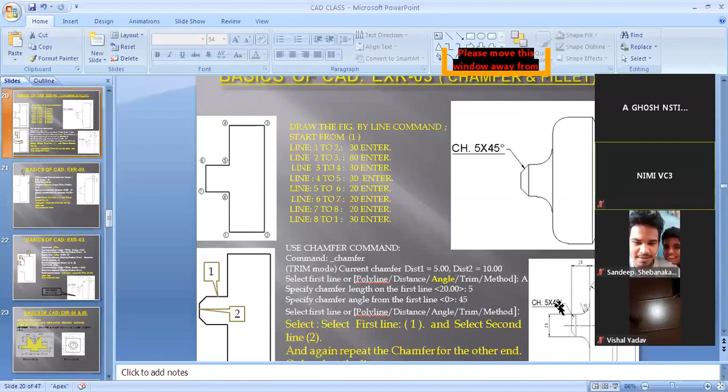That means if you give the first dimension as 10, then as per the figure you have to choose that first line too. And if you give the first dimension as 5, you have to choose the first dimension line accordingly. Look at the command - whatever dimension it shows, you have to choose and give the dimension accordingly. So if I take the first dimension as 10 and the second dimension as 5, you have to select the first line and the second line as per this dimension. We'll see this in AutoCAD and it will become clearer.

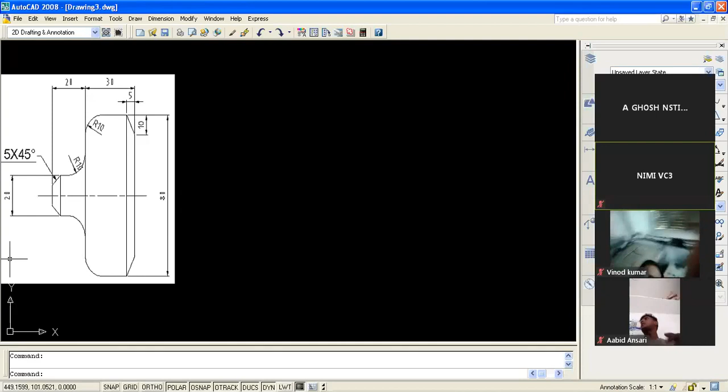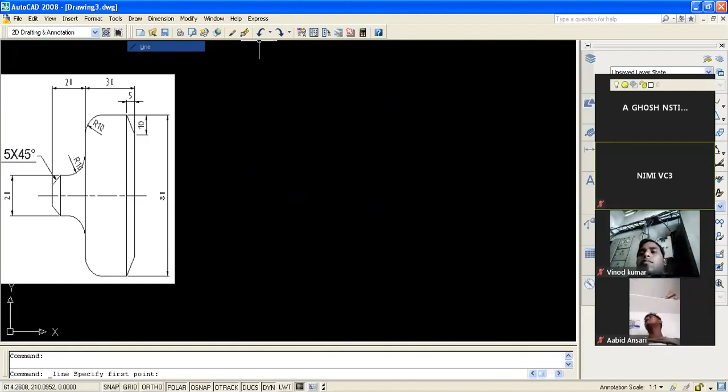From some point, as we made it before, we draw it like this - here 30, then take it 80. Sorry, then come to this point, this is also 20, and this is 20, and this is 20, it's like this. So first you make this 8-sided drawing.

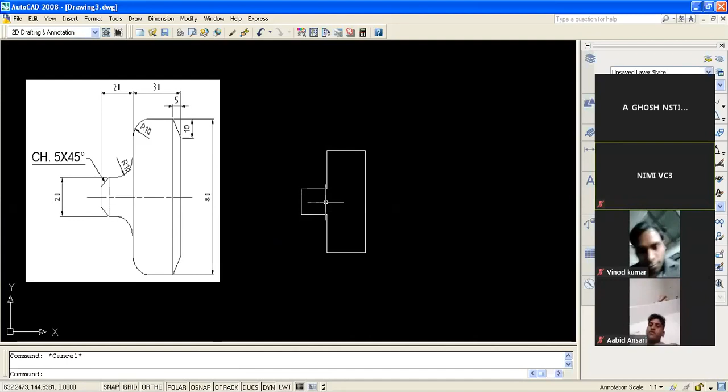Then the command asks to specify chamfer length. The length is 5 mm - you give 5 and enter. Then chamfer angle, 45 - enter. This is a 45 degree angle. Now comes the selection box - so you select this line and this line.

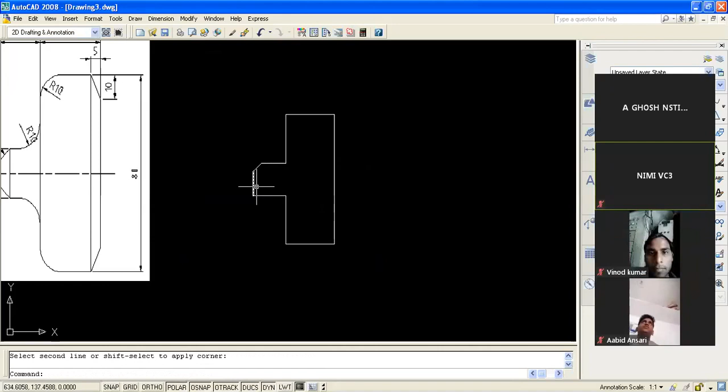Chamfer is done. Again repeat chamfer. Select this and this. Chamfer. Okay, now we go again for chamfer.

Now I am taking the option as distance, because in this area the distances 5 and 10 are irregular, so I am taking distance. First distance, chamfer distance. I am taking first distance as 10, enter, and second distance as 5, enter.

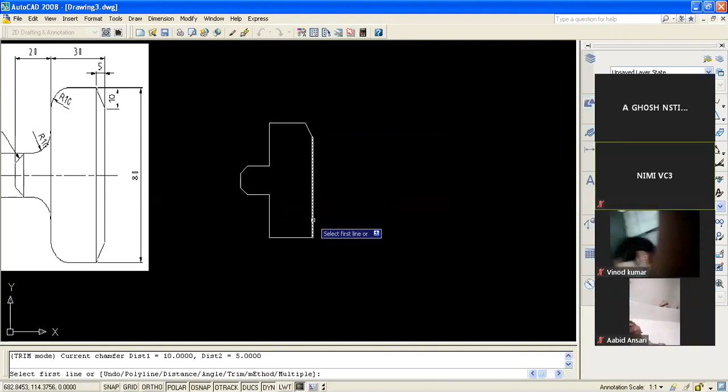So 10 we gave first, 10 is on the vertical line. So you have to click the 10 here first and then 5. Again repeat: 10 means vertical line first, second 5, and then complete.

So on this side also your chamfer is completed. Now I want to make the fillet on this corner, this corner, this corner, and this corner.

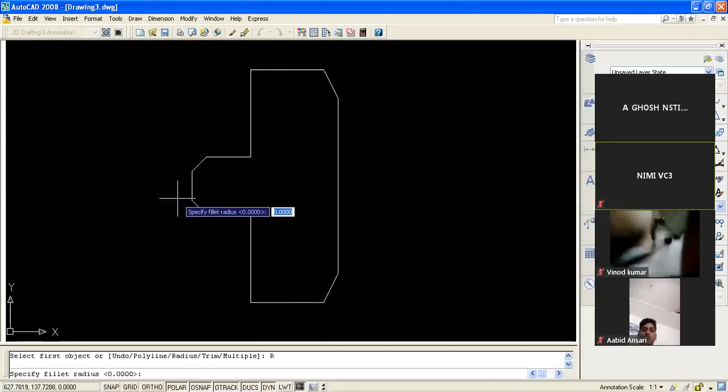So you go to modify, take fillet, right click, give the radius value - radius is 10, enter it, and the direction box will come.

Now select the first object, that means first line, maybe this line or this line, either is fine, no problem. So I am taking this line first and then the second line.

Right click, repeat fillet, again take this and this. Again I am taking fillet for this and this. Again I am taking this and this.

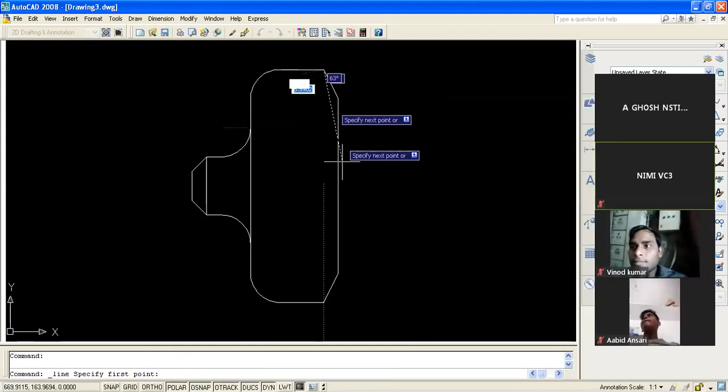Okay, complete. After that you go to the line command, click this line, and this line. Okay, so your drawing is complete.

So in this exercise, what we learned is that in the modify command there are two commands: one is chamfer and the other is fillet, and these are very important commands, used in many drawings.

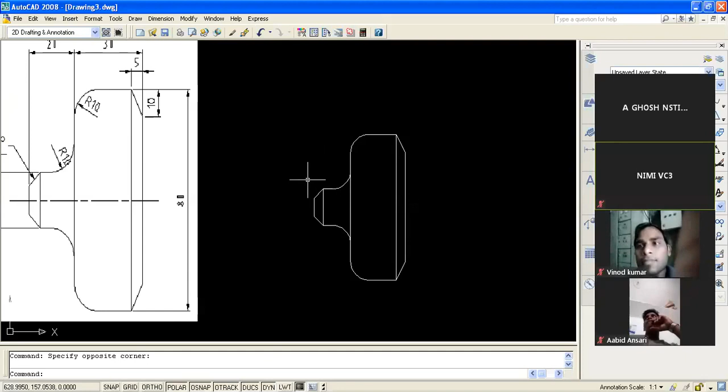So this is a very important drawing command. So you can use this command, fillet and chamfer.

Okay, now again we are coming here in the PPT. The next PPT is there, that is exercise 4 and 5.

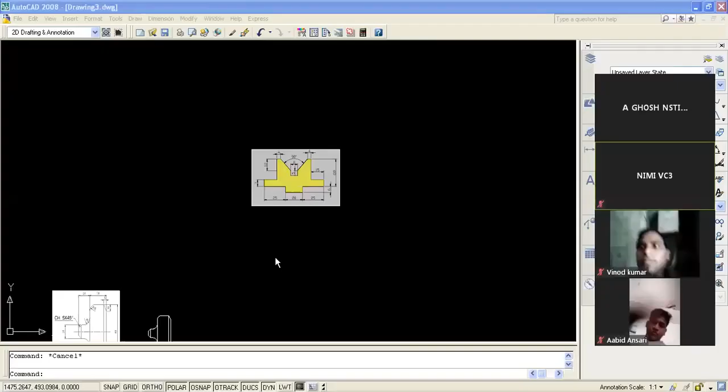Okay, now I want to make this drawing. What is that command? It is the line command. So from where I want to start - this is the technique of the drawing.

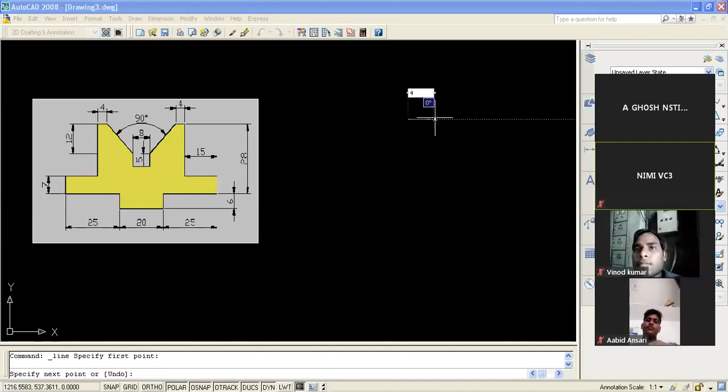Then I am coming, this line should be 4. Then I am taking here this 15.

Now I am coming here, this is 7. Then I am coming this side, this is 25. I am coming here, this is 6. Now I am coming here, this is 20.

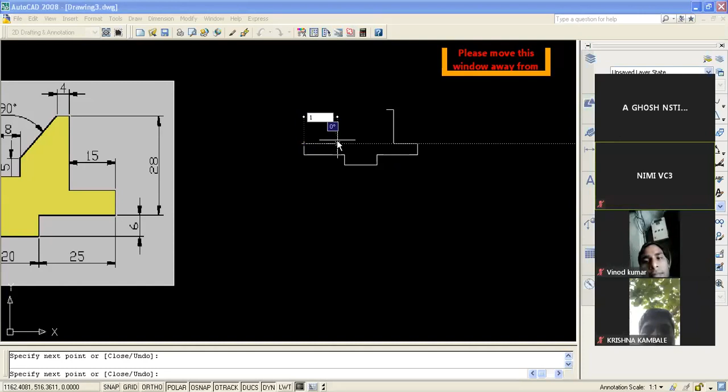Now this you can typically get from track, 25. You can get this also from track. With the help of this I am giving this dimension, 15, enter. Then I am coming here and this is 4.

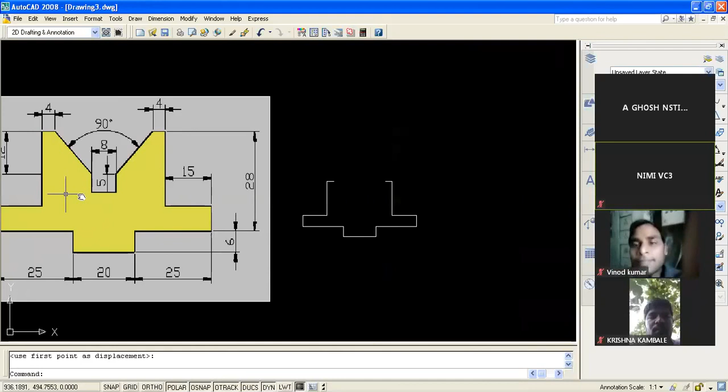Okay, now up to this the drawing is okay. Now what is the dimension there? This dimension - this height is 12, and this is also 5, and total is 28. So and 6, 34. So this point to this point is 17.

So you have to just click the line command and no need of any click, just move your cursor along the axis or track. So we give the 17 and enter, then your cursor will come shifted here.

So we just give this value 4, because this is total 8. I am taking from the center line, this is 4, and this I am giving as 5. Now come to this point and select line.

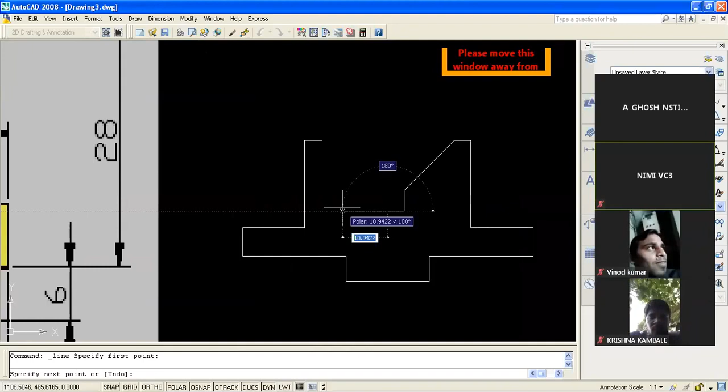Okay, and now again you go there, take the line command, again take this as 4, and this is similar to this, and come here. So this block is completed. This is the V-block drawing. Okay, so as per the dimension you can make the drawing.

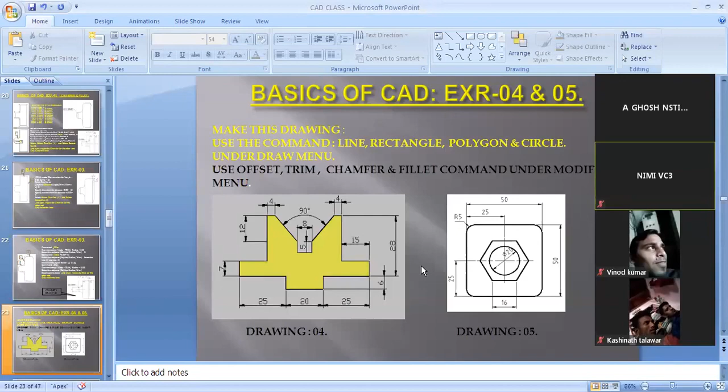So now again I am showing the PPT. The next slide is there. After that, this is the homework. You can make these two drawings as per your knowledge and skill, with the help of the previous commands: line, circle, polygon, and also modify command.

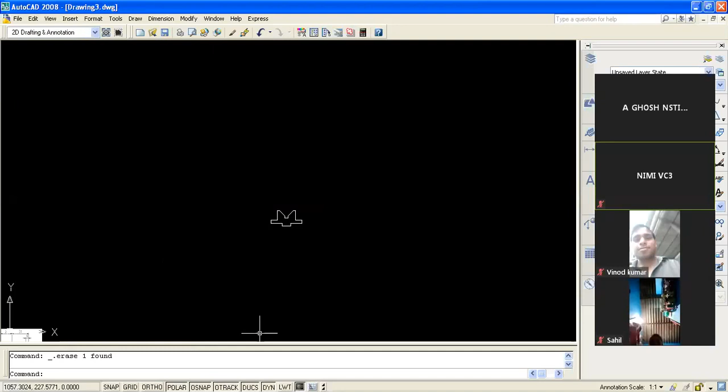So now the first circle: you go to the draw command, take circle, diameter is here. What is that? That is 100. You give the 100 diameter. Now go again diameter, same circle, diameter is 40 and enter.

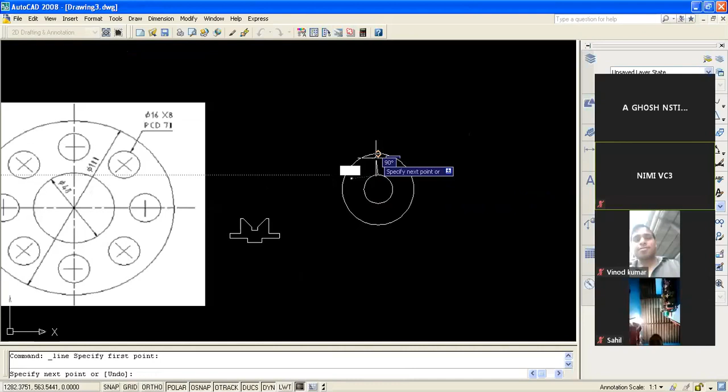Now the small circle's PCD is 70 mm. So you can take the calculation, or you can just make a line here. You do the draw command and diameter, click this midpoint and give 16 and enter. So you don't need to do the calculation, you can take this away also.

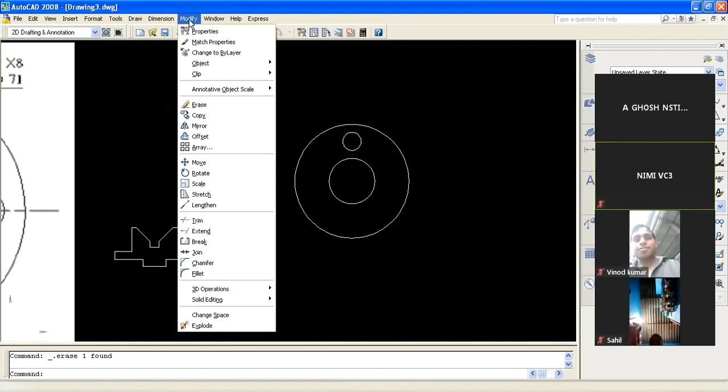Now this small circle, how will we make 8 circles from it? We go to Modify, take Array command, then this dialog box will come into the screen. There are two options: rectangular array and polar array. So you click the polar array option.

Now from the polar array, first you click the center point. Where is that center point? You click this option, just click here and pick the point from the screen. So you click this center, automatically the value will come here.

Then the method. If you click on method, you see there are three methods in this: one is total number of items and angle to fill, another is total number of items and angle between items, another is angle to fill and angle between items. So whichever choice you want to make, make it.

Normally we take total number of items and angle to fill. Total number of items is 8, and angle to fill is 360, which is default. Then you go to select object, select this small circle, right click, and come here to the preview command.

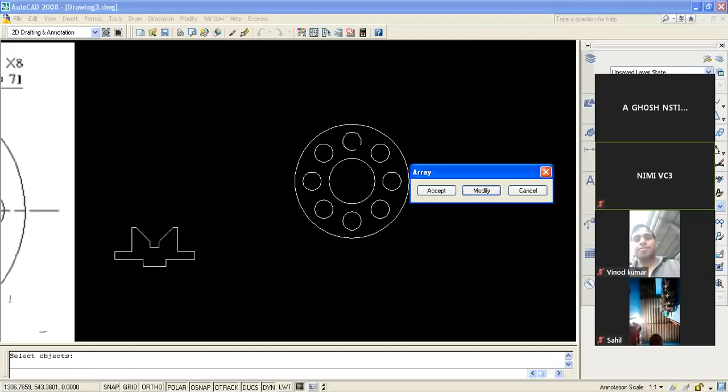If you go to preview command, it will show that it has been done. Now you can click accept or modify. If anything is wrong or any incorrect value is there, you go there, modify again, choose any modification. After that, take preview again and go for accept. So it is completed.

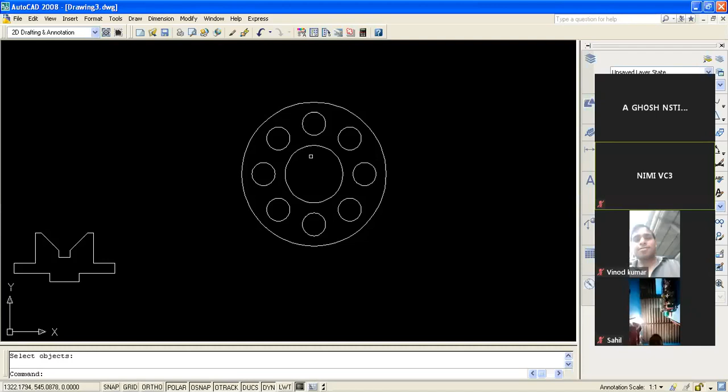Now, one additional thing: if it's a full circle, you can't tell which side it rotated from, clockwise or anti-clockwise. Suppose I want to make it like this, suppose I want to make it on this side - how is that done? Let's see how this is made. I want to make it on my right side.

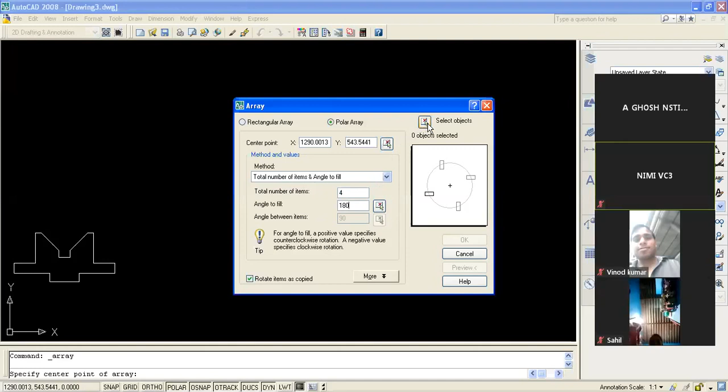For this you go to Modify, again take Array command, center is here, same center, total number of items and angle. So instead of 8, I am giving 4, and this angle will be 180, select object will be here, select this and enter, preview it.

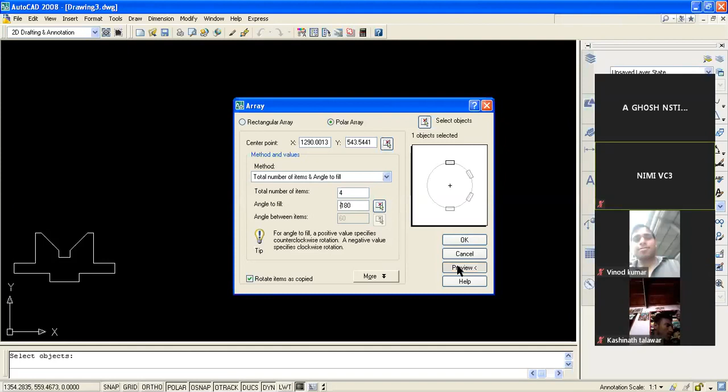See, so it is taking this side, but I want this side. How is that possible? Now go again to Modify, and instead of 180, it is normally taking anti-clockwise. If you want clockwise, then give minus 180, and preview it again. See, it is this side now.

So if you want to make it clockwise, always give the angle value as minus. If you want anti-clockwise, then give the plus value of the angle. Okay, then accept it.

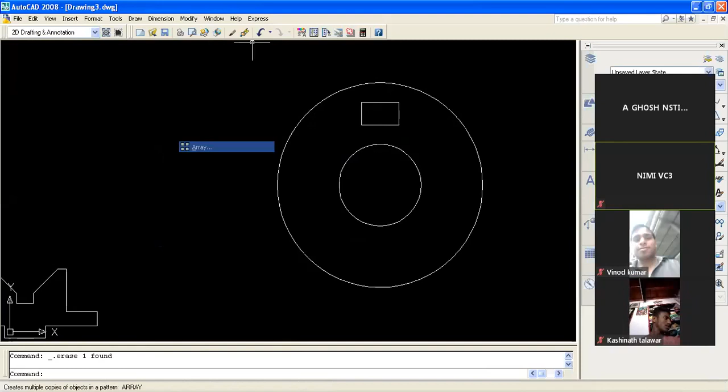Another important thing: suppose instead of a circle, I want to make a rectangle here, a small rectangle, and rotate-copy this rectangle into 8 numbers. Delete it, now go to Modify, Array, center is here, number is 8, and angle will also be 360, select object is rectangle, and preview it to see.

This is also the array operation, but you see this is shifted, not in the center. Why? Because there is one option, and you can manually check this. This is called 'Rotate Item as Copied'. That means rotate the item as it is copied.

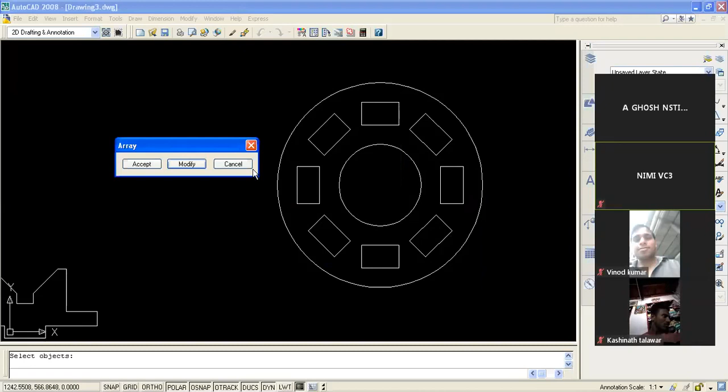You need to turn this on, it stays on by default. If by chance you don't turn it on, then if you turn on this Rotate Item as Copied and get the preview again, only then it can rotate like this, otherwise it will not be done. So this is a very important command, Rotate Item as Copied - this option should always stay on.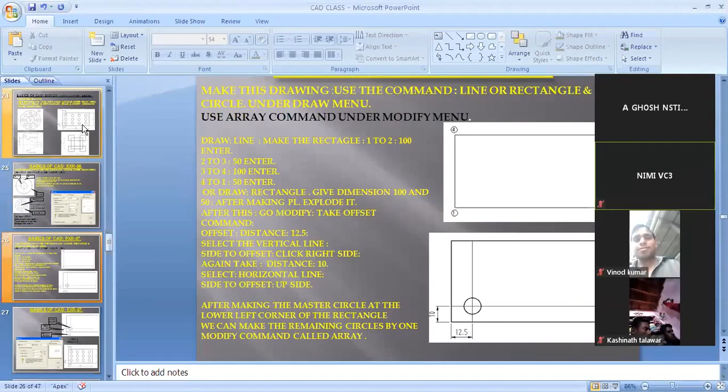First draw a line, make the rectangle from 1 to 2, 2 to 3, 3 to 4 and 4 to 1. A rectangle is formed with dimensions 100 by 50.

Next you need to make the small circle, the master circle. The process is: go to the circle command, take center diameter, but since you don't know the exact point, and it is an irregular distance of 12.5 on this side and 10mm on this side, you have to go to the offset command and take the offset value first as 12.5.

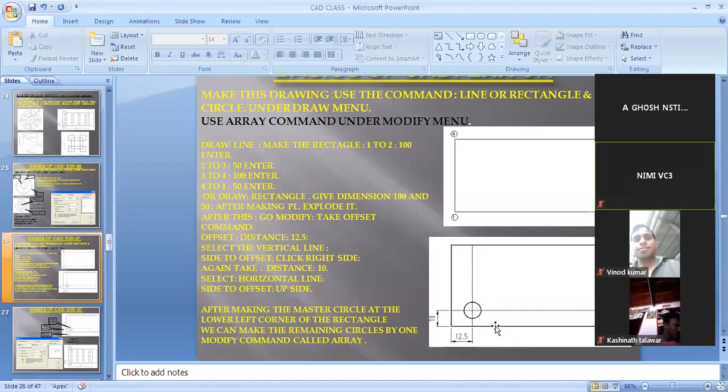Then go to the circle command, take center diameter, click this point as the center and give the diameter, then the circle will be displayed.

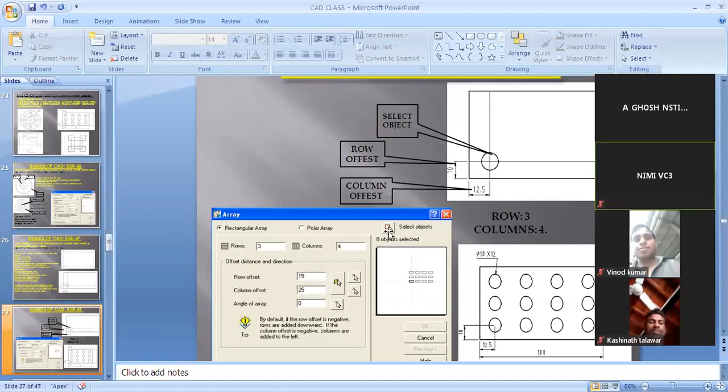Angle to array - angle is not there so it's 0. Then you go to select object - what to select? The master circle we made, select this circle as the object. This value is the row offset value, this is the column offset value, and select this circle as the object.

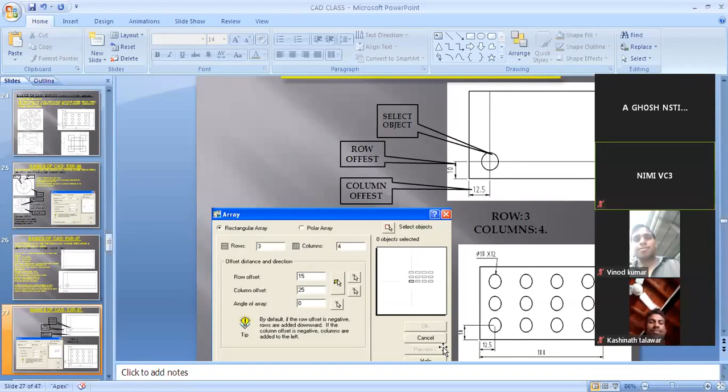So again I am showing you this in my AutoCAD. So I am taking AutoCAD.

So, rectangle, dimension is 100, 50, enter. Now I am taking the modify command and I just offset this rectangle.

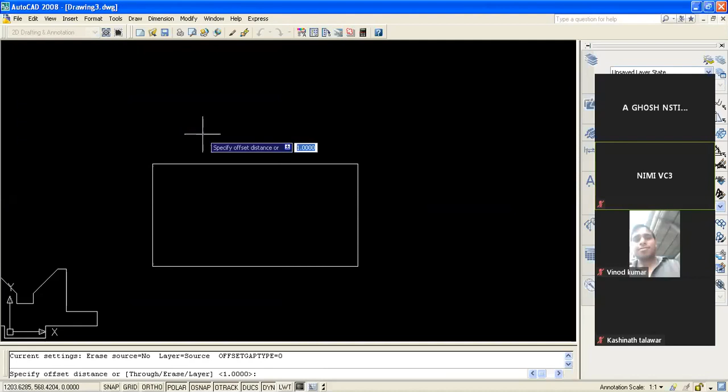Go to the modify command, take offset, value is first 12.5, enter. This is from here, and again I am taking 10, enter. This is from this side. No, I think this is not that.

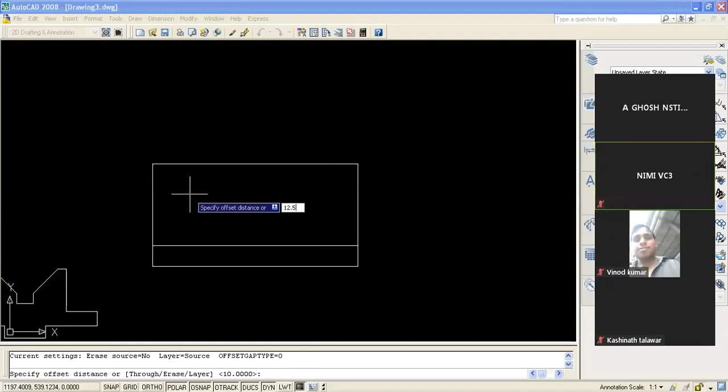Offset 10, okay, 12.5 from this side. Okay, fine.

Now we go to draw circle diameter from this located point. Intersection, first click it, and the diameter is 10, enter it.

After that, just select two lines and delete them on either side. Now I want to copy this circle into a number of circles as per my drawing.

The command is Array, Rectangular Array. Number of rows is 3, number of columns is 4, row offset meaning distance from one row to next row is 15, column offset is 25.

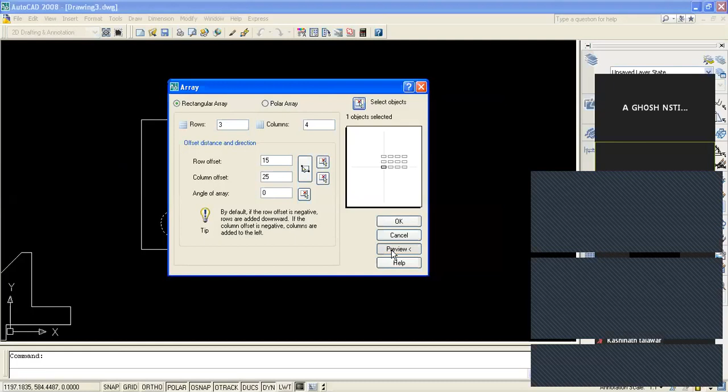And angle is 0. Select this circle as the object, enter and preview it. So see, the drawing is like this. Okay, no problem, so accept it.

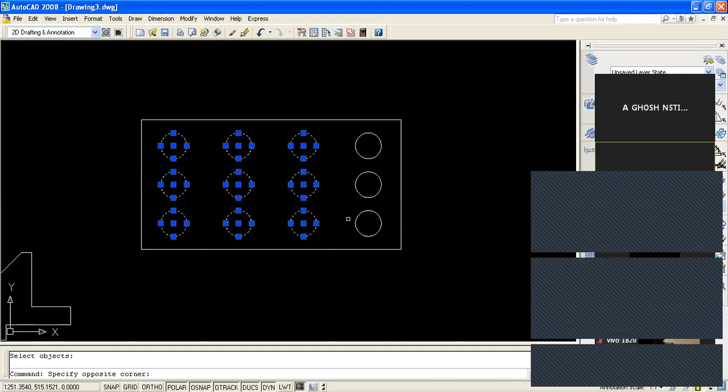But additionally I can say something - if this circle is not here, maybe I made it here instead. Some students can make it in this corner too, no problem, you can make your circle in this corner.

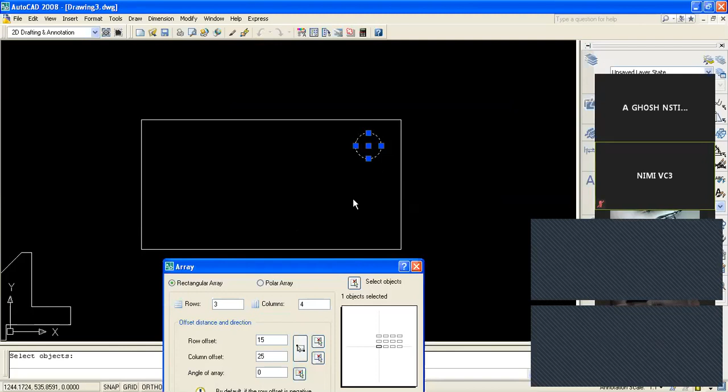So if I take this value as minus, and give the minus to this value, and this is also minus 25, and preview it, then it will go okay. So this is the difference.

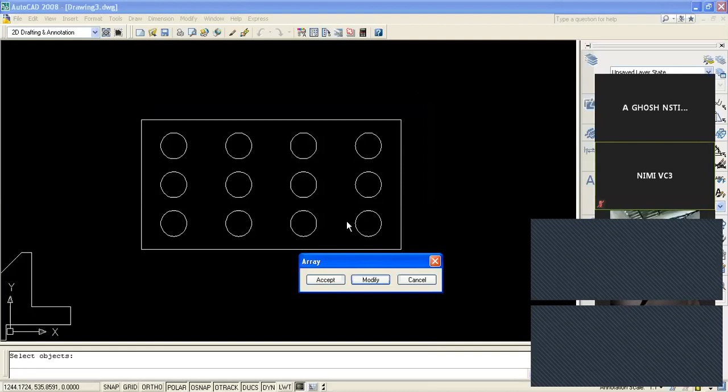If you choose any corner instead of this corner - if this corner is the first quadrant, it's positive and positive. If you come to this corner, it will be positive and negative. If you come to this corner, it will be negative and positive. If you come to this corner, both will be negative. So in this way you can reorient your basic circle, the parent circle, in any direction. Okay, this is the circle.

Another thing is there. Suppose I'll show this additionally. Suppose your drawing is like this. Now I want to make a plate like this, and in this I will make that circle.

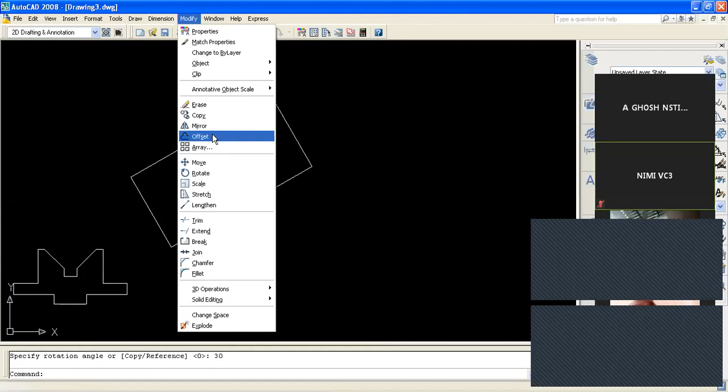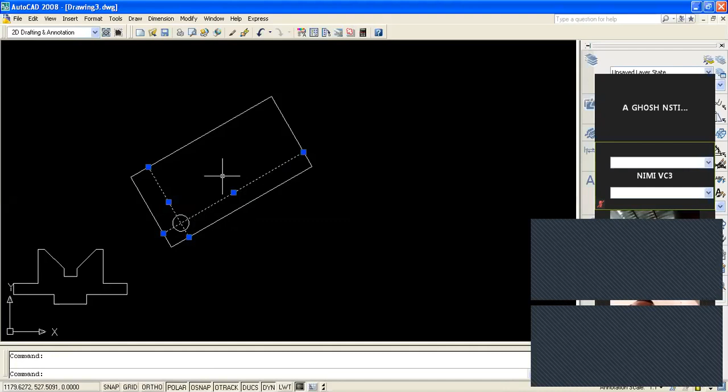So tell me, the method is the same. Go the 12.5 on this side, and again take the offset value 10 from this side. Now take the circle command, diameter from this point, give 10 and enter. Then this circle, top line top. But now this circle is here, and this is at a 30 degree angle.

So now if I do the array command, all equal - there only this will be 15, and I am changing this also to 25. If I select the object here normally without any angle, you see the value will be like this. Now this is at an angle, so go to modify, instead of angle 0, give it and preview it. Then this will be along this axis.

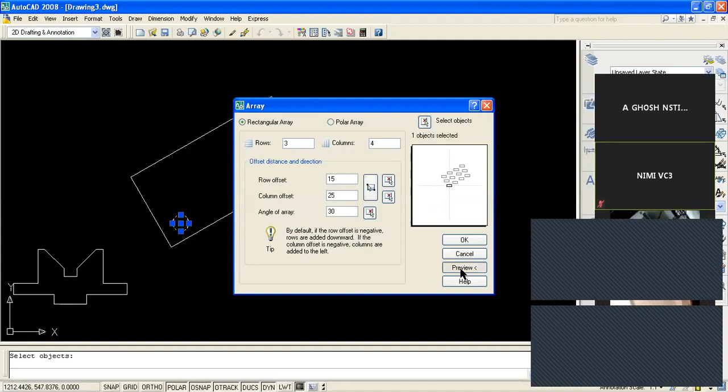So this is the meaning of angle - this is the angle of array. So if your basic drawing is at any angle, the axis will be oriented like this according to your input value of the angle. So this is that - angle is there. So now preview and accept it. So this is one method, rectangular array.

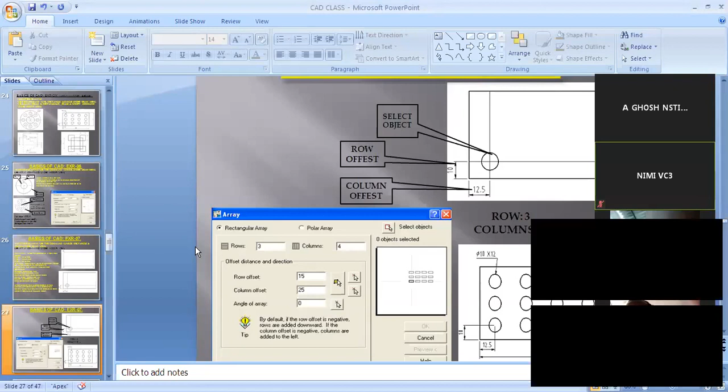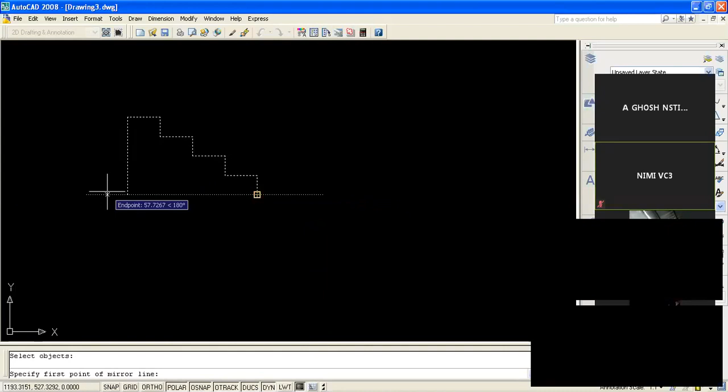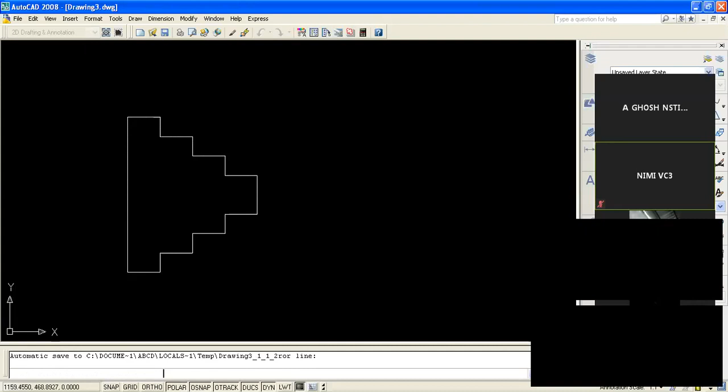Yes, this is a parent view. Now we go to the modify command, take mirror, select entire object, select the object, then first point of mirror line - where this may be or this may be, no problem. I am taking this as my first point and keep your cursor horizontal. If I click like this or like this, then it will be distorted. So you take your cursor horizontally and the second point will be here, click here, then it shows erase source object, no by default, so you just enter it, then the next part will be the mirror. This is the mirror command - this is a parent view and this is a mirror view.

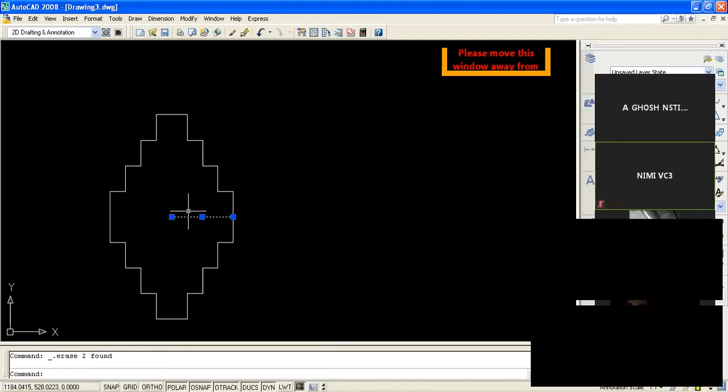जैसे ये हॉरिजॉन्टल एक्सिस के ऊपर हुआ है, सपोज आई वांट टू मेक इट अ वर्टिकल एक्सिस, ये भी हो सकता है। सपोज आपका ड्राइंग ऐसे है, आप इसको भी मिरर कर सकते हैं। So you go to the mirror command, again select entire object, first point and second point, click here, enter, enter. So this vertical axis - इस vertical axis के ऊपर इधर होकर दिया। फिर मैं इसको भी क्लिक कर सकता हूँ और यहाँ क्लिक करके, यह horizontal है, एंटर करके इधर भी बना दिया। तो जो भी symmetrical object होता है उसको बनाने के लिए मिरर हम लोग यूज करते हैं।

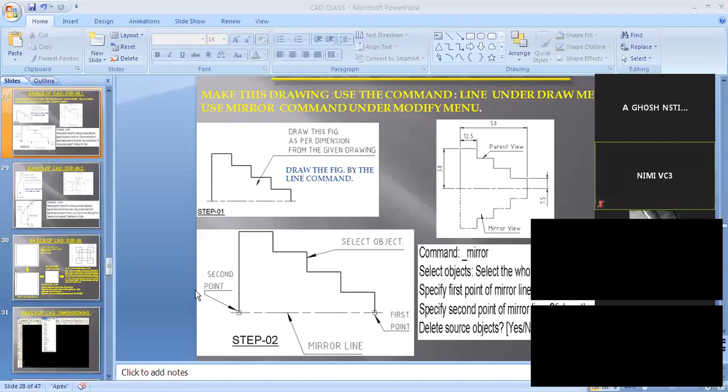Now again we'll go there in the PPT and next slide. This is the mirror command. Next, इसमें हम ऐसे एक ड्राइंग दिखाया था बटन जैसे, उसको वर्टिकल एक्सिस में देखा, तो वो भी आप लोगों को दिखा दिया।

नाउ द नेक्स्ट एक्सरसाइज इज 9। इसमें हम लोग यूज करेंगे स्केल एंड कॉपी, मल्टीपल कॉपी। स्केल हम लोगों का बहुत इंपॉर्टेंट ड्राइंग कमांड है, क्योंकि जब हम ड्राइंग बनाते हैं वो भी एक स्केल में बनता है। पेपर में जब हम बनाते हैं उसमें भी हम स्केल कमांड यूज करते हैं। तो स्केल कमांड वेरी इंपॉर्टेंट कमांड है। वो किसी ड्राइंग को रिड्यूस कर सकते हैं, इनलार्ज भी कर सकते हैं, किसी भी ऑब्जेक्ट को।

नाउ व्हाट इज द एक्सरसाइज - इसमें 50 बाई 50 एक रेक्टेंगल बनाया और उस रेक्टेंगल को बनाने के बाद उसको कॉपी किया। कॉपी कमांड से कॉपी बनाया, और कॉपी करने के बाद उस कॉपीड ऑब्जेक्ट को हम स्केल करके हाफ कर दिया, मतलब उसका फैक्टर 1:2 में हाफ कर दिया और वो 50 जो है वो 25/25 में रिड्यूस हो गया।

आफ्टर दैट उसको हम लोग कमांड स्केल, सिलेक्ट ऑब्जेक्ट - स्केल कमांड में आपको ऑब्जेक्ट को सिलेक्ट करना पड़ेगा, एंटर देना पड़ेगा। After giving the enter, then the command will change and come to specify the base point of the scale. That means किसी भी एक पॉइंट को आपको बेस पॉइंट दिखाना चाहिए, and that base point may be end point or mid point or any point.

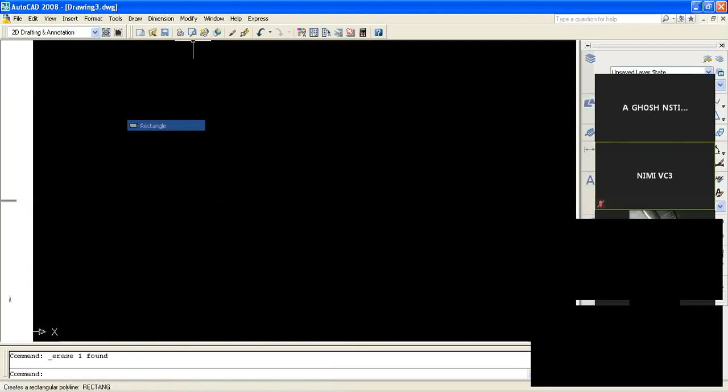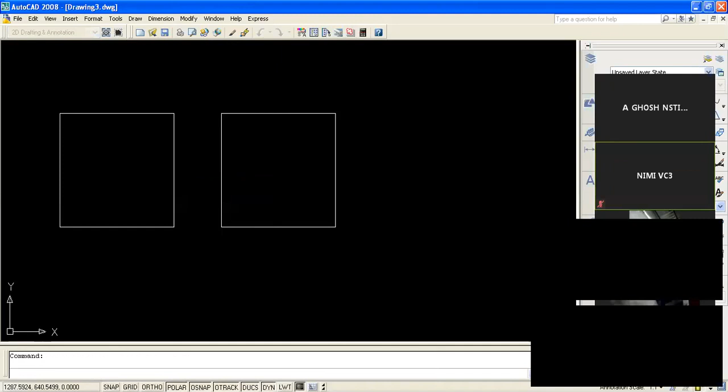Okay, 50 by 50, one rectangle. Now modify, copy, select this, enter, base point, displacement point, done, it's copied. After copying, you scale one of them. So go to modify command again and take the scale command, select this, enter it, base point, you can click this as a base point.

When I click it, then it can be reduced or enlarged. So now you have to give the value, the scale factor value. What is that value? Its value is 0.5 scale.

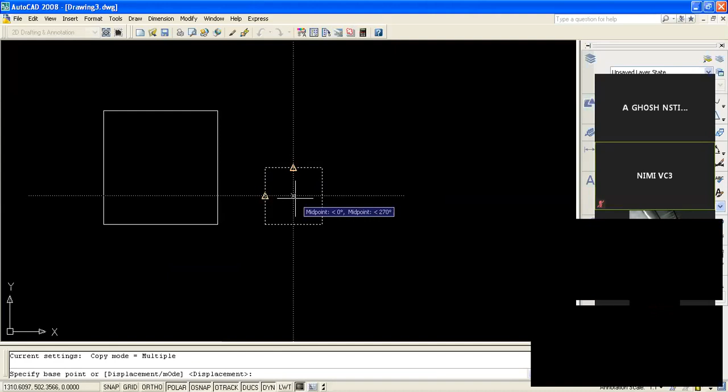Now again go to modify, take copy command, select this, enter it. Now base point - where will the base point be? I need to move this to the four corners, so the base point will be a very important point. You have to take this point as the base point. So I am taking the base point with the help of the OTrack command.

So an imaginary point is there. You click here, move it, and just click here, here, here, and here, and enter it. Now the last one, you click it, right click, move. Moving one corner and placing it, your drawing will be complete.

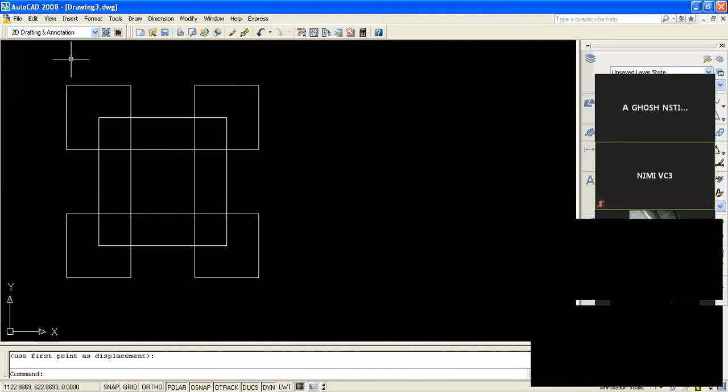So this drawing has been done with the help of two commands - one is the scale command and another is the copy command. In the scale command, just as we reduce, it can also enlarge. As we select the whole drawing and scale it from one point by 0.5, that means it will become half.

Now if we measure its dimension, it was made as 100, so its dimension will become 50, and this one also 50, and this dimension is now 25 and this dimension is also 25. So this is the reduced scale.

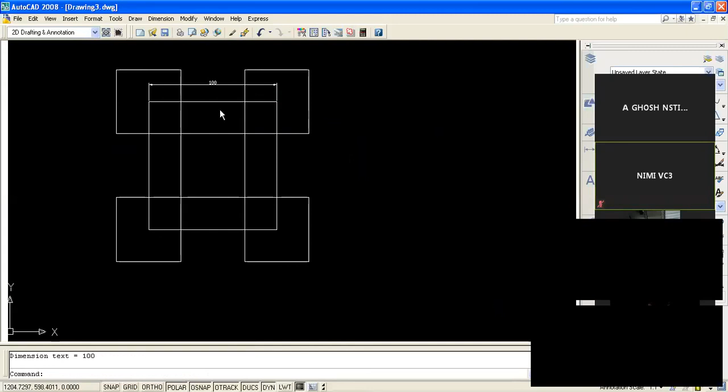Again I can make it an enlarged scale. Whatever scale you need you can give it. I am taking scale, select this, giving 2, enter. So it became double. Now if we measure its dimension it will show this is 100, this is 100, and this is 50 and this is 50.

So this is the scale command. You can reduce or enlarge any object anytime. This is a very important command we use in AutoCAD, it's used a lot when making AutoCAD drawings.